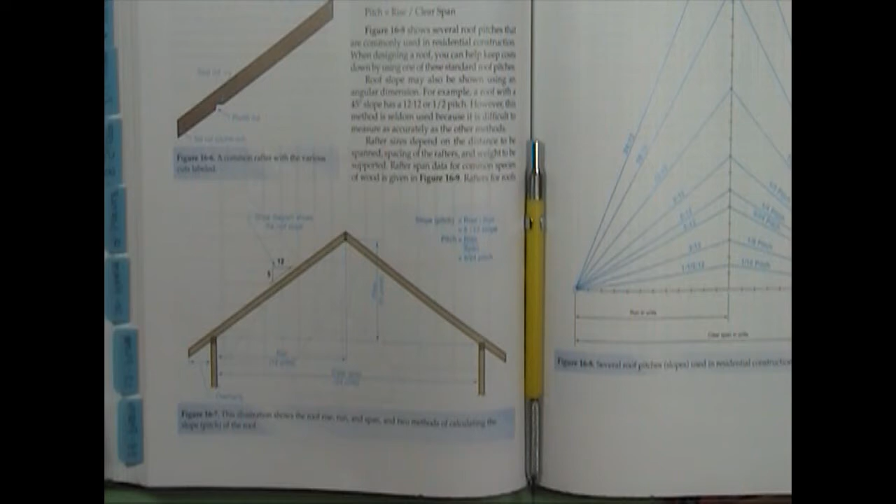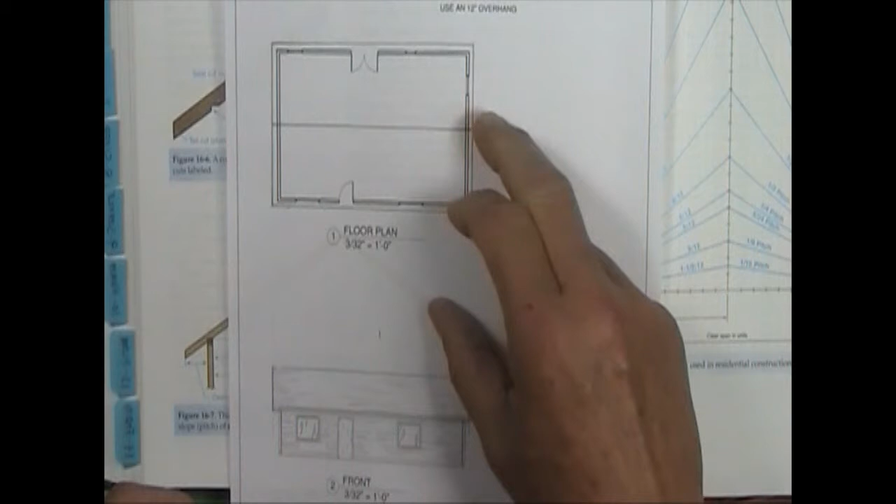Okay, we didn't get a chance to talk about rafter tables in class last night, so I wanted to throw this video together. If we take this same floor plan you're working on sketches, my clear span over here is a little less than 24 feet, which is kind of long for a joist to have to span. So we're going to assume that there's a wall in the center, or a beam if we don't have walls, like for a door opening. But we'll assume that there's a wall down the middle, which gives me a 12-foot span.

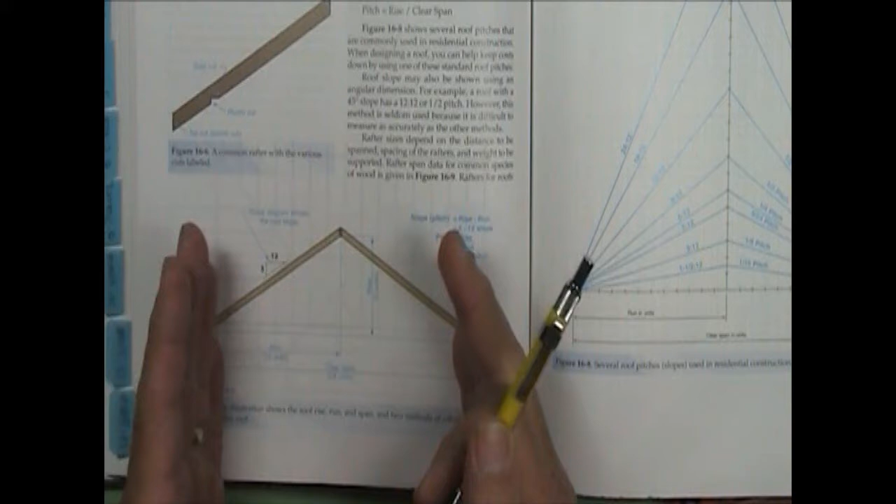Now the rafters run like so. This diagram doesn't show a ceiling joist, but the ceiling joist would actually be in this location right here. And like I did say in class, it provides tension to prevent the walls from wanting to go outward, okay? And so that's the normal location for a ceiling joist.

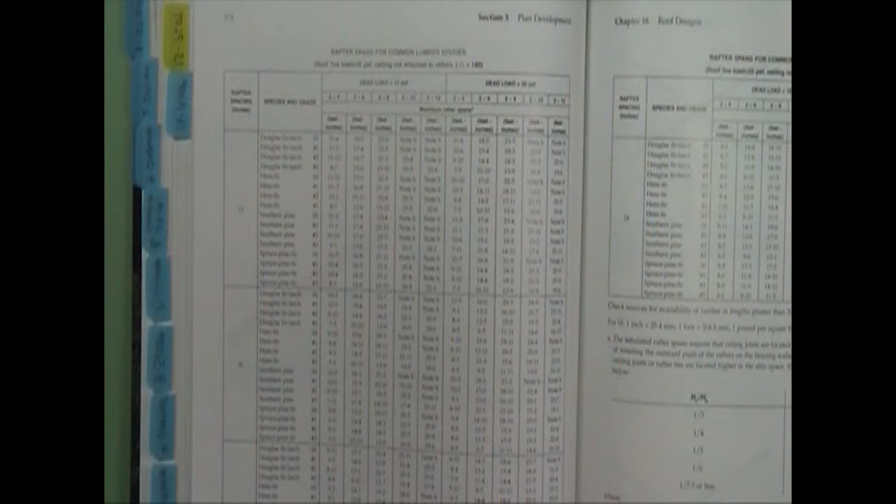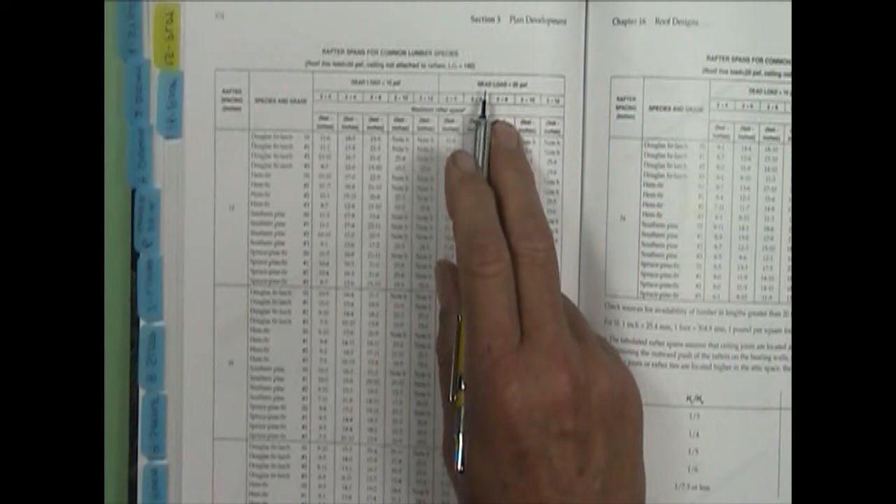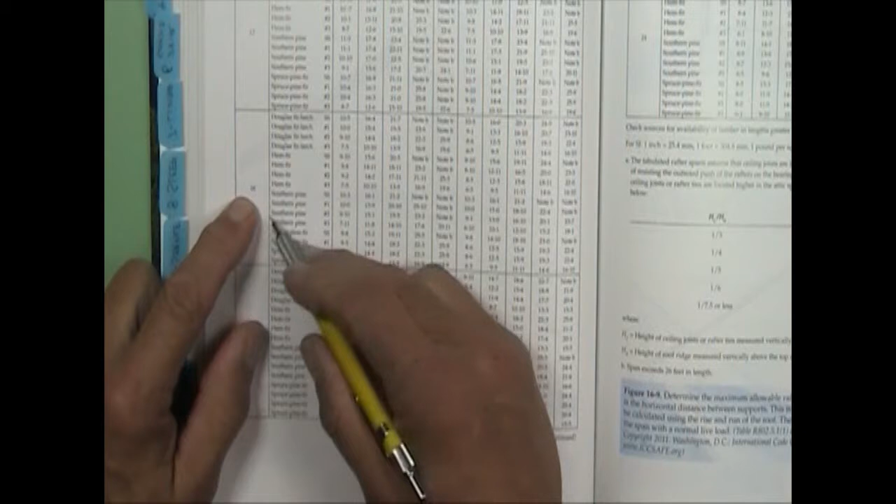If we look at the rafter span table, the book just gives you this one page of it, but in the actual tables that are used, you have some for low slope roofs and some for high slope roofs. You have a variety of live loads and deflections and a variety of dead loads, okay? So we're just gonna go with this one because that's what we have to work with. And let's just go with a 16-inch on center spacing and southern pine lumber.

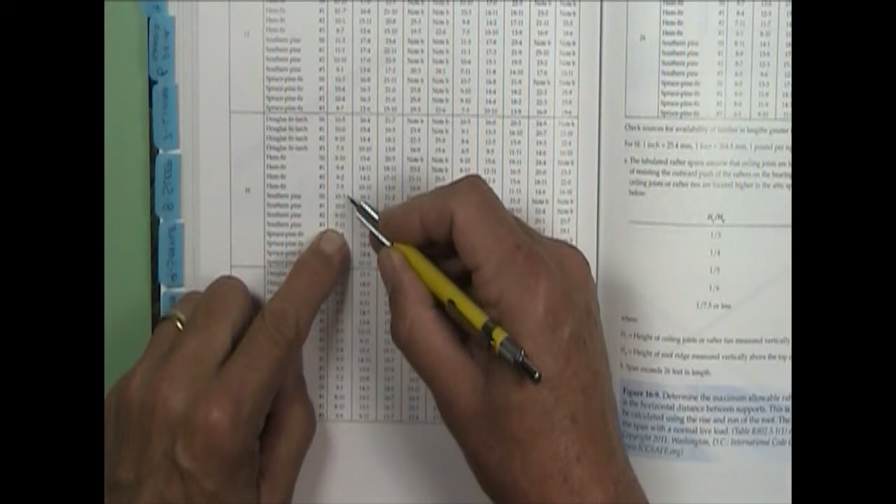And so we look at a 2x4. Well, that will only go from 7'11" to 10'3", okay, depending upon the grade of lumber. So a 2x4 will not work for our rafter. So let's go to a 2x6. All right, so we see here a number 3 will not work, but a number 2 will. Okay, it'll span 15 feet 1 inch. We only have to go a little bit less than 12 feet. So we could use a southern pine number 2 at 16 inches on center for our rafters.

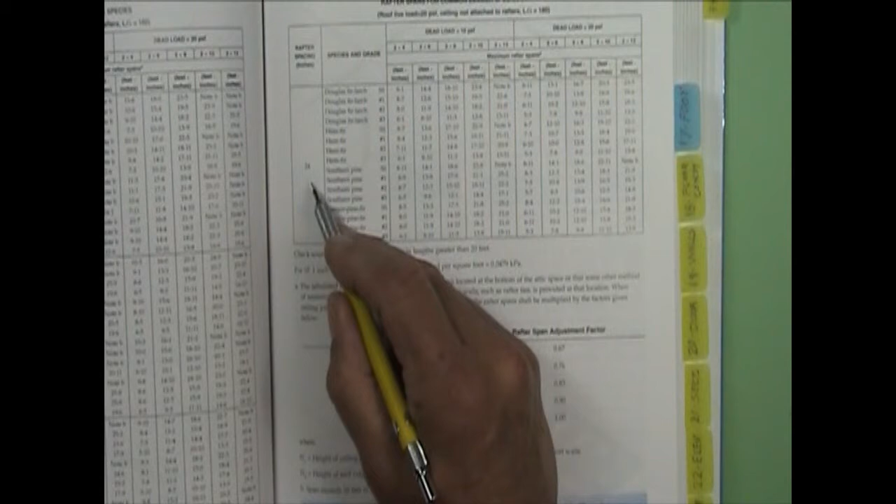Okay, now if we wanted to consider 24-inch on center spacing, we could look there too. A number 2 would still work for us at 24-inch on center spacing. A number 1 would definitely work with that. All right, but while I'm still on this page, if you look, a lot of these will say see note B, down here, which means that particular piece of lumber, like a Hem-Fir, Select Structural, 2x10, could go to 26 feet, okay? You're not gonna get very much lumber that's in excess of 26 feet long, okay? Trees grow tall, but they don't grow that tall, that big.

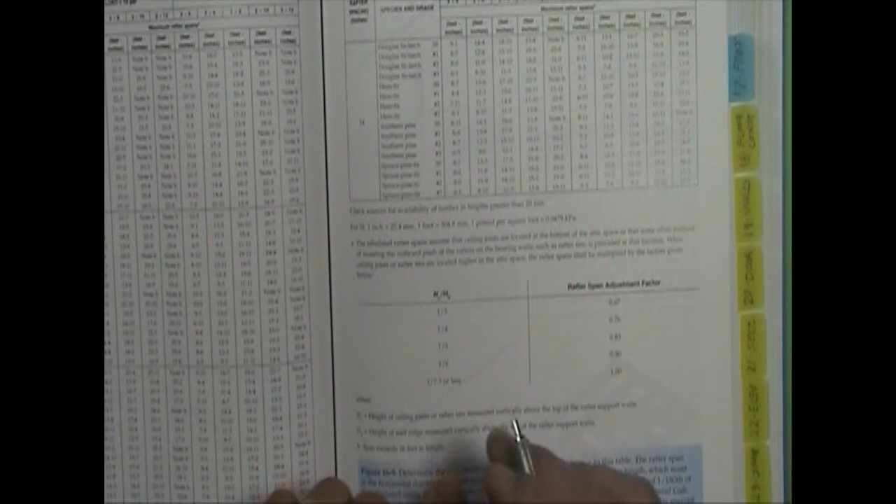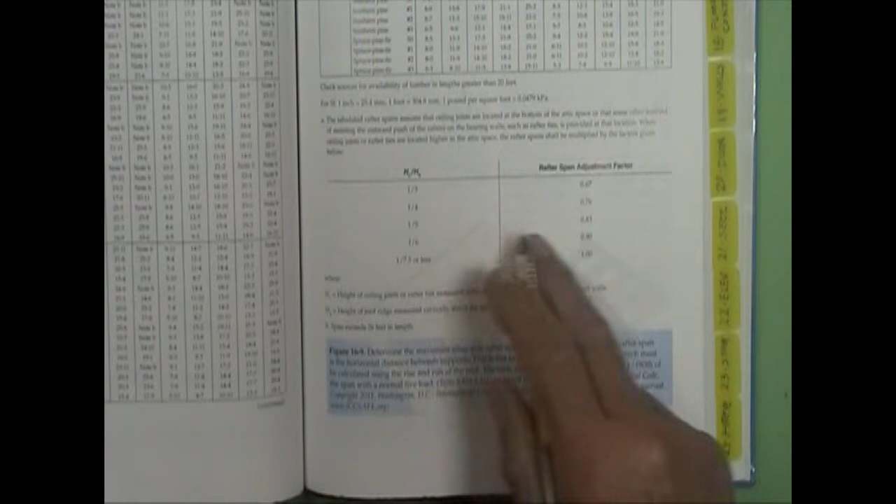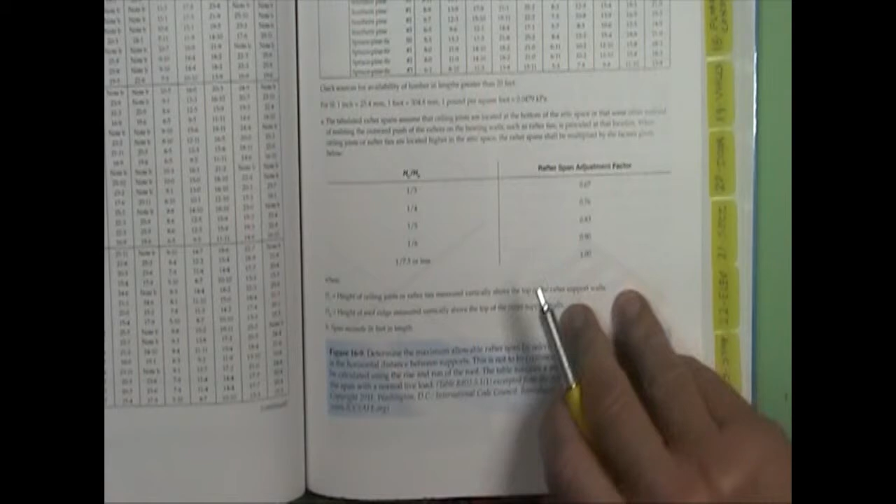Now this chart right here has a conversion factor that you could use if your ceiling joist is not at the bottom of the attic space, like I say, the ceiling joist is not here, but it's actually a little higher up than the walls, or you may have what's known as a rafter tie, which is like up here. Okay, so you may end up putting in a vaulted ceiling. We're not going to get involved with this in the class, but in those cases where the ceiling joist or a rafter tie is higher, you use these adjustment factors in the tables, okay? I'm just saying that so you'll realize that's there, all right?

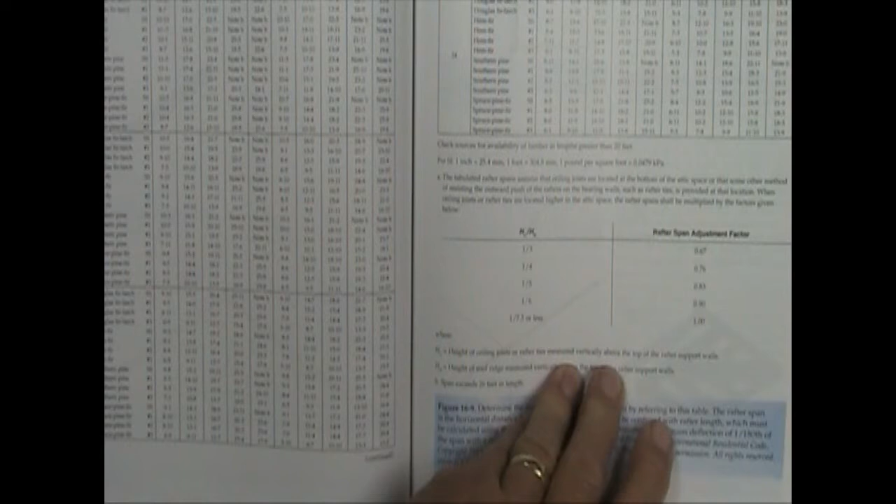All right, so we know we could use a 16 on center number 2, or we could use a 24-inch on center number 2 also. Either one of those would work for us in a 2x6. So let's look back here in the appendix. It has the ceiling joist table. Let's look at that and see what we have to deal with. So if we go with our 16-inch on center spacing, we couldn't use a 2x4, all right? A 2x6 could span 17 feet 8 inches, all right? So that will definitely work at 16 inches on center.

Let's look at the 24-inch. And we could use a 2x6. We could actually use a 2x6 number 3, okay, which is a lower quality grade of lumber. So either of these would work for us. We could go 24-inch on center spacing or 16-inch on center spacing. The 24-inch spacing means we use less lumber in building our roof, but it's still strong enough for us, okay?

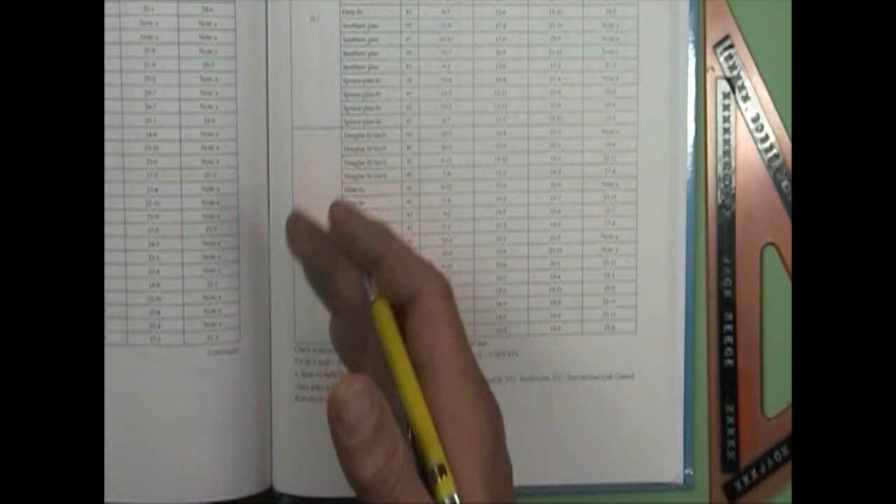The one thing is you do want to keep your ceiling joist spacing equal to your rafter spacing. So if you're going to do 24 on center, you want both of them to be 24 on center. It just makes construction easier. So we could use Southern Pine number 2, 2x6s at 24 on center. That will work. And back to my rafter span, I could use the same type of lumber, a Southern Pine number 2 2x6 at 24-inch on center spacing. So that would work for both my rafters and my ceiling joists.

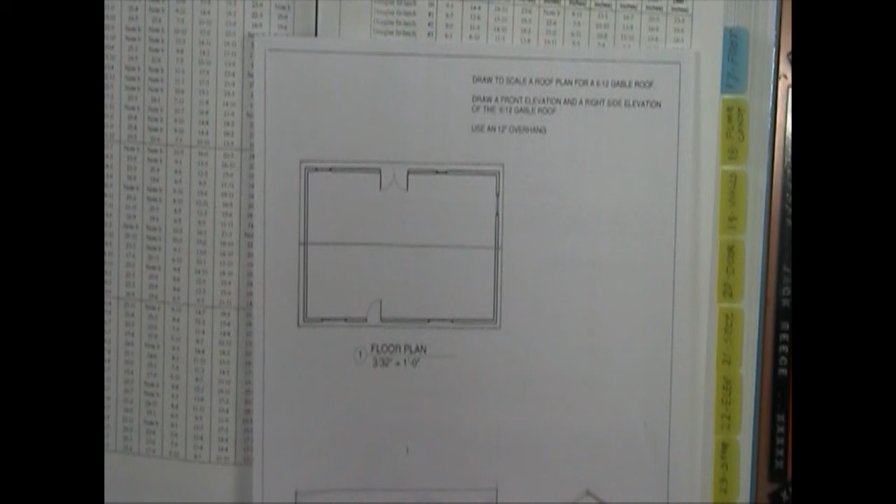Now, it's going to change based on whatever your house plan is and that span. But like I did say in class, especially for ceiling joists, you want to use the same size of lumber all the way through the building if at all possible. Rafters, it's best if you can, but it's not critical. Okay, so if you have one of the other examples, like an L-shaped building, you may have a different size on the L-shape coming out into the garage. So there you go. That's a quick explanation on rafter tables.